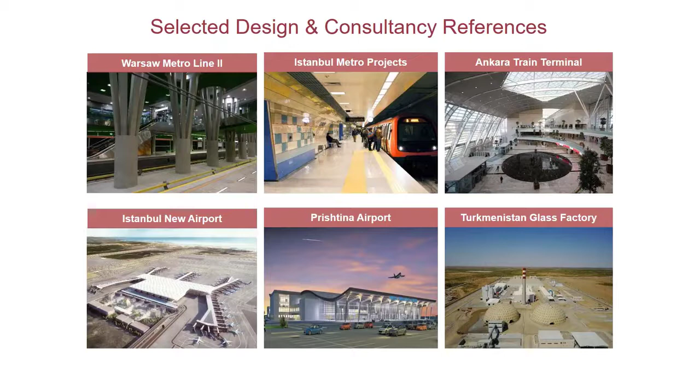And what I guess we want to emphasize over here is that the Prota Group is not just a software development group, but it also has a very strong background in engineering projects. So we're not just developing software without really using the software ourselves. And so being a first-hand user, we know exactly what is needed by the engineers, and so that's what we produce.

The ProtaStructure suite is on your screen right now. It's the ProtaStructure program, Prota Details, ProtaSteel, and Prota BIM. We'll be talking about ProtaSteel today mostly, but just to remind you of the other parts of the suite, ProtaStructure and Prota Details. ProtaStructure, as you know, is a structural BIM design solution for concrete and steel buildings. What needs to be remembered is it's very flexible. It's both 2D and 3D, and what's important, it's multi-material.

So you don't need to go to separate programs to model your concrete and then a different program to model your steel. It's all done within ProtaStructure, and it's a full analysis and detailed design package, full design reporting and quantity takeoff. It has links to Prota Details and ProtaSteel, which we will be talking about today, and then BIM links with Revit Structure and IFC. So that's ProtaStructure. And the main benefits, why would you use ProtaStructure?

It's the ease of use and maximum productivity. Obviously, in the times we're living in, there's a glut of software, and every software claims to do everything, and they do most of the time. But the question is, how do they do it? How much time do you need to spend to get a certain thing done? And if the difference between one software and another is a lot, then obviously that's what makes the difference, because this is man hours. So our main emphasis is on maximum productivity and ease of use. That's what makes it a much better product than its competitors.

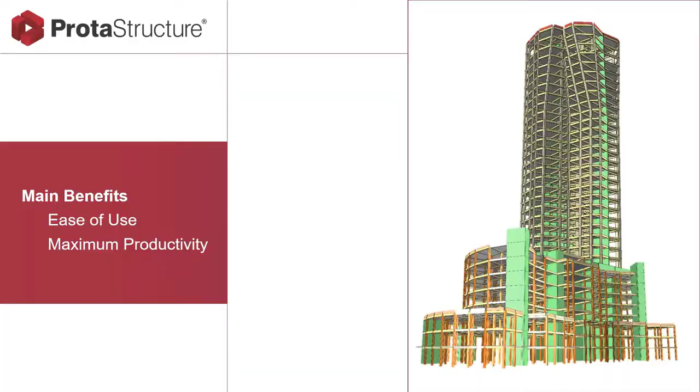ProtaSteel is, like I said, what we'll be talking about today. It's automated connection design and steel detailing of your projects. It's totally integrated with ProtaStructure. We'll be talking about some of the main features like Intelli-Connect and some of the design reports and the wide range of connections, etc. Obviously, in a seminar like this, it's impossible to go over all the features. All we want to do is just to get you excited about the main capabilities of the program, so that you can see what you can do with it and take it from there.

So ProtaSteel, today's webinar, what do we mean by connection design and steelwork detailing? What we mean is the full transfer of your ProtaStructure model to ProtaSteel, including all your analysis results. So once you're done with the ProtaStructure model, you will not have to remodel the structure in ProtaSteel again. You will just transfer the model, including the analysis results, into ProtaSteel and just start doing the detailing. It's integrated intelligent connection design using a comprehensive range of flexible connection macros. We'll be talking about those in a minute.

Automated steel connection design using our revolutionary Intelli-Connect to instantly create constructable arrangements. We'll be talking a lot about this. You'll see it's a fascinating feature. It's one of the features which no other software has at the moment.

Full connection design reporting with step-by-step calculation documentation. We'll be talking about this as well, and you will see that this is a feature which is normally a separate program. None of the programs which are offering this kind of capability are offering a full connection design reporting built into the program itself. Usually these programs are sold separately. I'll be talking about that part, but what you need to know is that it's entirely integrated, and there's a lot in it.

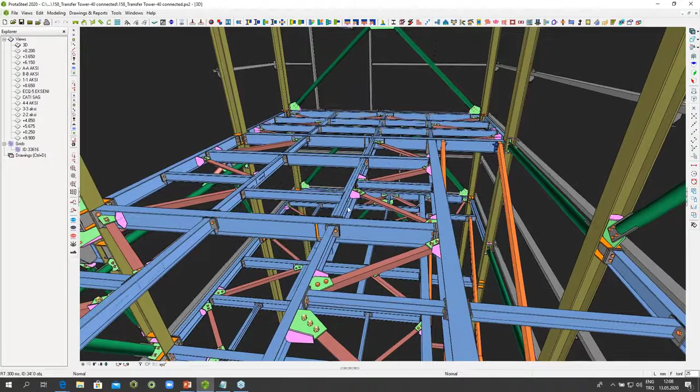So like I said, what is ProtaSteel? ProtaSteel is a steel detailing solution. As you can see on the screen, you have a little view of a detailed model, and I can zoom in to see what it is like. As you can see, all the bolts, all the plates, all the welds, all the elements, all the cuts have been modeled directly in. So the purpose of the program is to leave nothing unmodeled, to take the model from ProtaStructure to ProtaSteel, and then model all the connections in ProtaSteel.

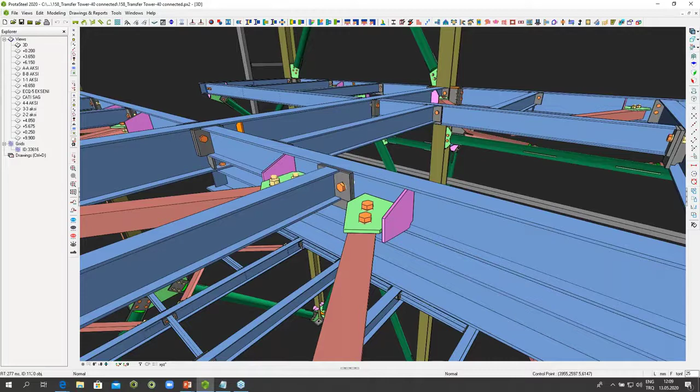And then once you have the model connected, you can create your shop drawings from there. You can create your connection drawings from there. You can take material takeoffs, etc. So that's what we'll be talking about today. So let me begin by opening the model on which I'm going to show you most of the features.

Okay, so the program is all about detailing. The program is all about connecting. So obviously we need connection macros. We need fast methods to connect the steel. So let's begin with some of the simpler connections. We've got a range of connections over here. You can see on the top of the screen. These are all the connections which are available.

And don't be misled into thinking that there are not so many, because in ProtaSteel, most of these connections are multi-faceted, and they can handle multiple situations, as I'll show you in a minute. For example, if I were to talk about the Purlin connection, you can see there are different types of connections which are all built into the same connection.

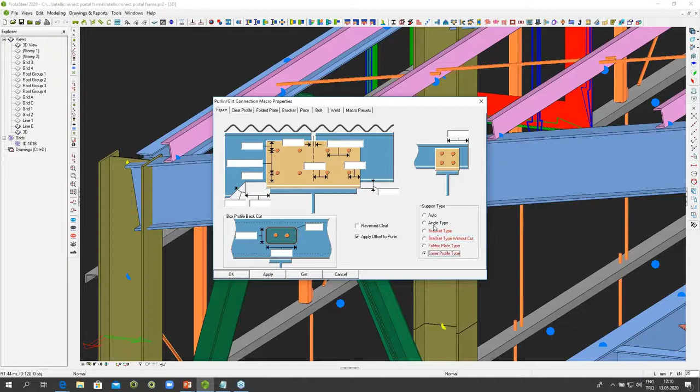So I'm going to choose the angle type with the reverse cleat over here right now. And I'm just going to show you. All you need to do is just pick the main beam and pick the purlin, and there you have the connection. It's as simple as that. There's nothing else you need to do, basically click the elements which are related, and there you go. Your connection is ready. It's as simple as that.

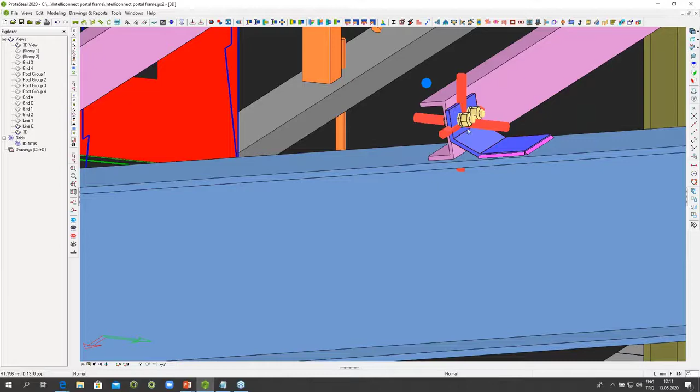And as you can see, as I just showed you a while ago, the options you have are many. You can change the type of the connection right from within the macro. You can go to a completely different connection, and normally programs would have all these features as different icons. So all these, the angle type, the bracket type without cut, the folded plate type, all these would be different icons, but that'll just create a clutter on the screen. But over here, what we have is you can just connect it as you go.

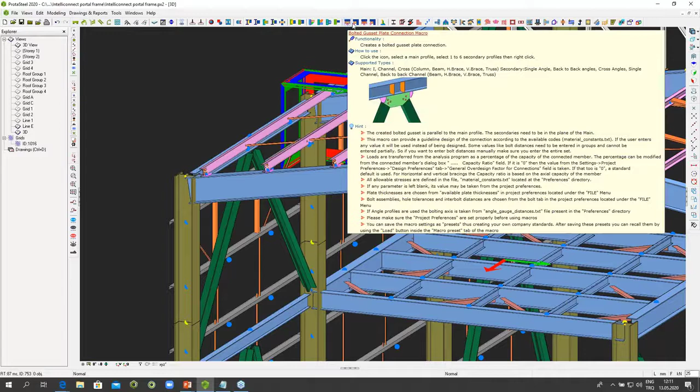You have the moment connections over there, the haunch connection, the directly welded connections, the flange plate moment connection, which is very commonly used, and you have the extended end plate connection, and then you have all your bracing connections for the vertical braces and the horizontal braces and the trusses, and you have the welded gusset connections and the welded corner gusset connections. Then you have connections for the purlins and the splices, and there's a whole lot which we can talk about, but let me just quickly take you through some of them over here.

So for example, if we were talking about the girt connection over here, let me go back to this particular connection and change the type and use the bracket type without cut, which is more appropriate for the girts, and just show the column, show this girt, show the other girt, and that's it. Reverse this. I don't want to make it hang from the top, so I'll use the reverse cleat option, and there you go. So as you can see, with a few clicks, I'm able to model my connection.

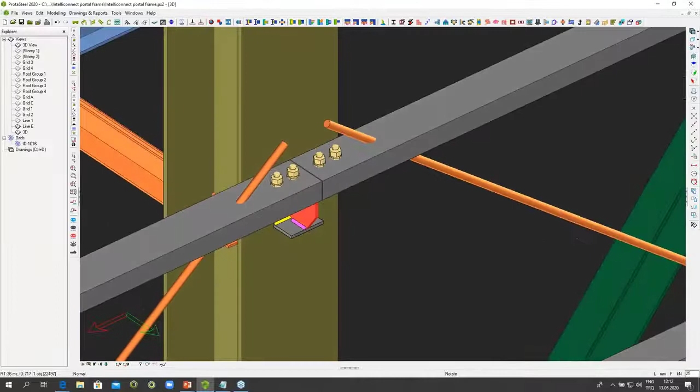Previously, we didn't have the welds in 3D. As you can see now, we have the welds in 3D, so it's easier to see your welds, and that makes it a lot easier to visualize them. In a similar way, you can continue connecting. For example, this point over here can also be connected with the same one. So whether there are two girts coming in or a single girt coming in, the same macro will be used to model it.

Now let's go over the splice. Obviously, every model is going to have areas which you will need to splice. So let's just go over that. Just by a few clicks, you are able to splice the connection. Let's go over some other columns. It's as easy as clicking, and I'm going to show you an even easier way in a while. But for the moment, you can see on the screen that it's extremely easy to connect.

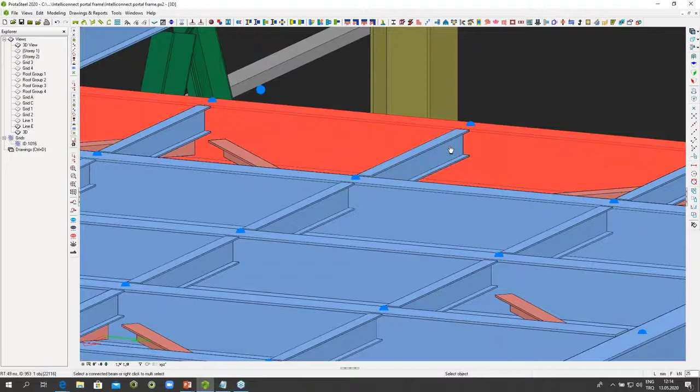Now let's talk a bit about the floor. It's one of the major parts of the connections. We have large floors in our buildings, and these floors can be connected in different ways. We have different options. For example, we can have a stiffened end plate connection. So I can just go and connect this main beam and this secondary beam, and there I have a stiffened end plate connection. And it's a very commonly used connection. It's one of the best connections as far as ease of erection is concerned. It's slightly eccentric, but it's also very useful for other reasons.

Then we have the beam-to-beam end plate connection. So for example, if we have this beam and this beam, we can have an end plate connection, which is different from a stiffened end plate. Or what we can do is we can have a fin plate connection. We can have a connection like this. So all these are options which we can use in our floors, and obviously all of them have their own merits, and depending on what we want to do, we can use them very easily. What I want to say over here is that all these connections are being designed as we go.

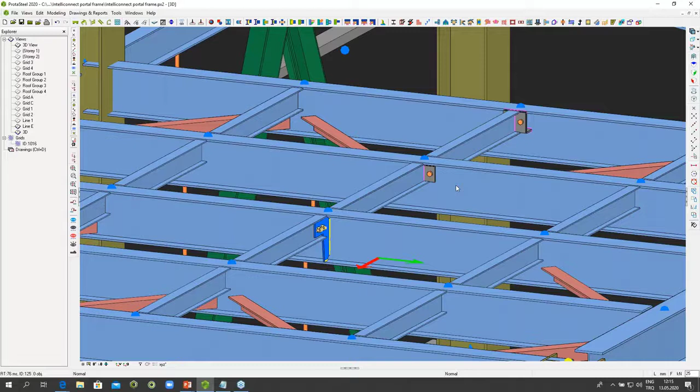So that's one of the most important features which we'll be talking about in a while, but I just want to emphasize that as we go along, normally the biggest amount of time which we lose, for example, when we are connecting, is that all these macros have a lot of input, and all these numbers have to be inputted theoretically, and that's a lot of input. I mean, anybody with not too much experience in the field of steel will find this pretty overwhelming to enter that much information to get a properly designed connection.

But with ProtaSteel, the advantage which you will not find in other softwares is that these connections are being designed according to the loads which have been transferred from ProtaStructure. So, for example, I'll do a little complicated example over here. Let's go and connect this column with this beam, and this is a haunch connection, and it's got the top stiffener and the bottom stiffener, but I want the middle stiffener as well. So I just go inside and I go to my figure and I add the middle stiffener. So now I have the middle stiffener as well.

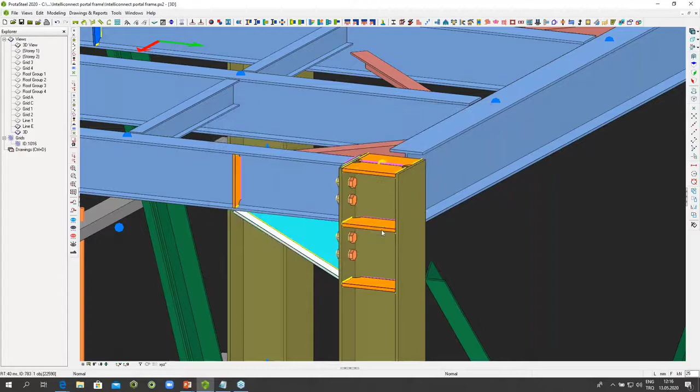Now I go on the other side, and on the other side I have another beam coming in, and this beam needs to be connected. But now these two stiffeners are creating a problem. They're getting in the way of the connection. So I'll show you a feature which is very useful. I just select the column, select the beam, and I say that I want to use these existing stiffeners from the other connection as part of my connection, and there you go.

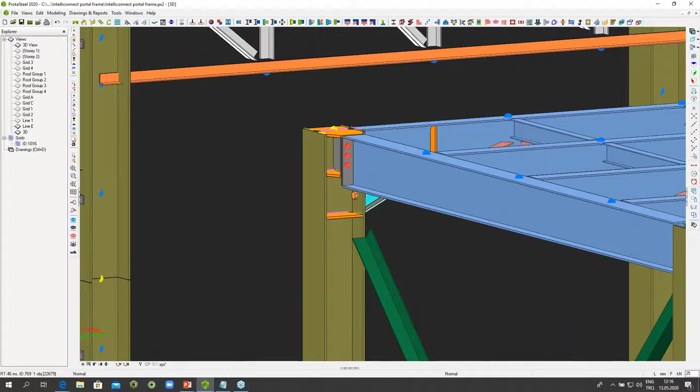So what you're seeing is a very complicated joint with a haunch on one side and a stiffened end plate connection on the other side, which have worked together, as you can see on the screen. And with a few clicks, we've been able to connect them. I showed you the floor beams, the haunch connection, the connection from the other side. I can show you how the fin plate is connected, how the stiffened end plate is connected.

Let's do a bit of the bracings. For example, these are the vertical bracings. All you need to do is just show the beam and show this vertical bracing, and there you go. Your connection is done. Let's do a bit of the trusses, for example. Let's go over the trusses. So for the trusses, all I need to do is choose a welded gusset connection, and I need to choose the bottom chord. These are the secondary elements, and my truss is connected.

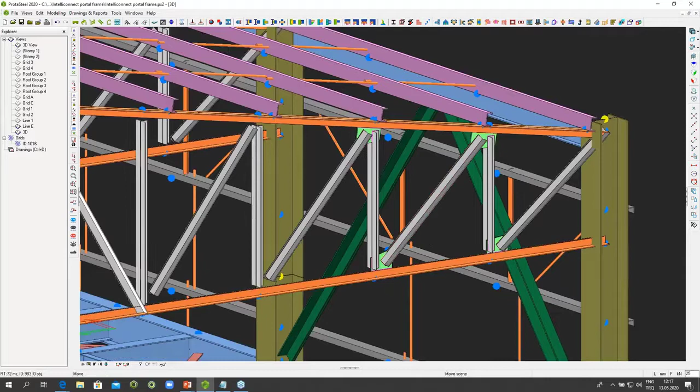This one is connected as well. This is connected as well. As you can see, I'm just clicking on the elements, and the connections are being made. What about over here or over here? If I come to this point, what I can do is I can quickly use this macro over here and connect the truss. So very quickly, as you can see on the screen, I can go about making my connections. Let's do a bit of base plates.

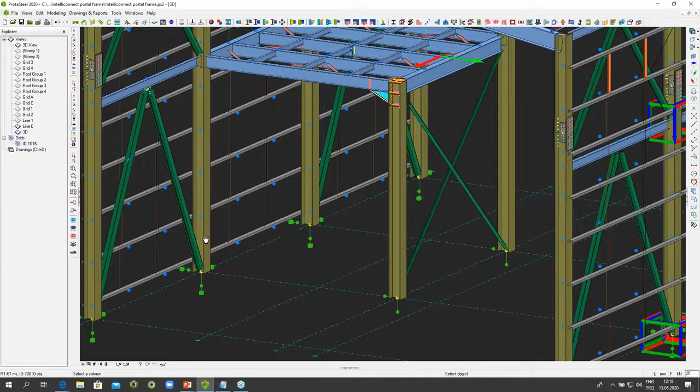So for example, this is one feature I want to talk about quickly and then move on. Let's do a base plate, and it's the same macro as you will see, but there's a difference between this column and this column. And the difference is that this column has a fixed base. As you can see, all the releases have been fixed, whereas this column has a hinge. So the rotations are allowed. The program will automatically detect this, and while I'm using the base plate on this column, it's going to produce a fixed connection. But when I use the same macro on the hinged column, it's going to produce the hinge connection depending on the end conditions of the column.

So these kinds of presets, which I'm not going to be talking much about today because we don't have much time, but what you can do with ProtaSteel is you can actually create company presets for all different types of profiles, and then basically just start clicking away with these intelligent macros. Because you'll have the company presets in the background. They will be intelligent. They will realize which profile you're talking about. They'll realize what structural condition exists, and they'll know the loads. And all you will need to do is just point and shoot.

The other programs, if you actually sit down and compare, what you will see is that the majority of your time is spent on entering the data. This is no exaggeration. The majority of the time is spent on all these numbers on the screen. There's so much to input for each and every connection.

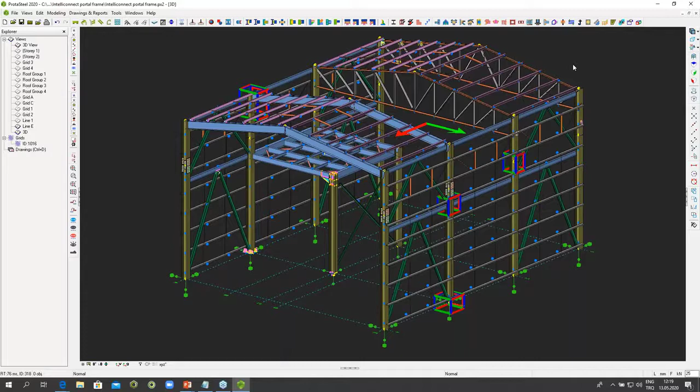So normally, even if you were well experienced, you would spend about 5 to 10 minutes entering a single connection. But once you have the loads from ProtaStructure, once you have the company standards set up, and once you have the company presets set up, it becomes extremely easy to make these connections. And of course, it's not just structural connections. Let me just continue with this a bit.

So we had a base plate over here, and what you can do is you can add the anchor bolts, for example. So you can select this base plate and you can add anchor bolts to that, and then you can double click on the anchor bolt and say I want a different angle on that, and you can turn it to whichever direction you want, and very easily you have your anchor bolts fit in.

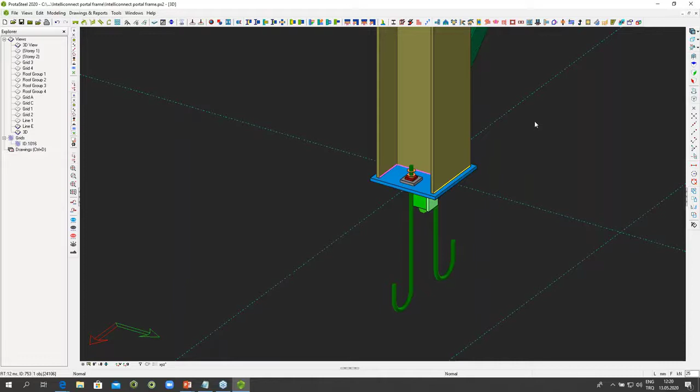Obviously, this is not the only type which is supported. You can have different types of anchor bolts, the C type, the simple type, and there's a background file which you can change to modify the different types. So those are very easy. And let me come back to the non-structural connections for a bit now, so that you can see the wide variety of things I'm talking about. But before I do that, let's do this.

So let's say we have a floor which has a concrete top on it. So we can add the studs extremely easily, as you can see. Very easily, I'm just going to add the studs. So it was as simple as that.

Now let me go ahead and add some handrails, just to give you an idea. Let me just add a handrail over there. Let me just add a handrail over here. And let me add a handrail on that beam. And once the handrails are added, you might think they're connected to each other. They're at a distance. They shouldn't be like this.

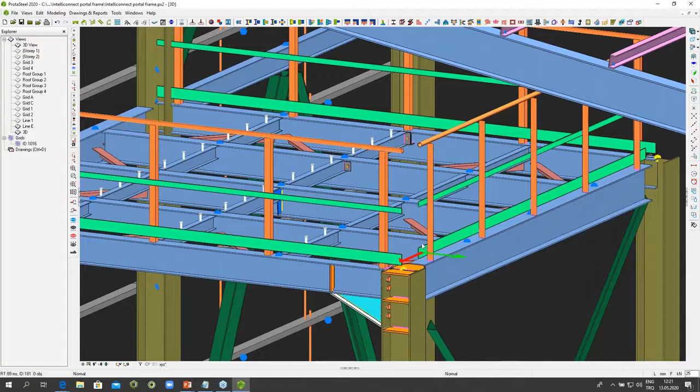So we have something which I just showed, that this handrail needs to be connected to this handrail. And there you go. Even the pipes are connected. The bottom, the toe plate and the knee plate, they're all connected. Let's join these two as well. I need to go to the other side to see it better.

Yeah, just go to the other side and go to my connection, and I say this handrail needs to be connected to this handrail, and there you go. So the knee rails, the knee plates, and the toe plates are all connected. So as you can see, it's not just structural connections, it's the non-structural connections as well, which can easily be modeled. What about if we had some checkered plate on this?

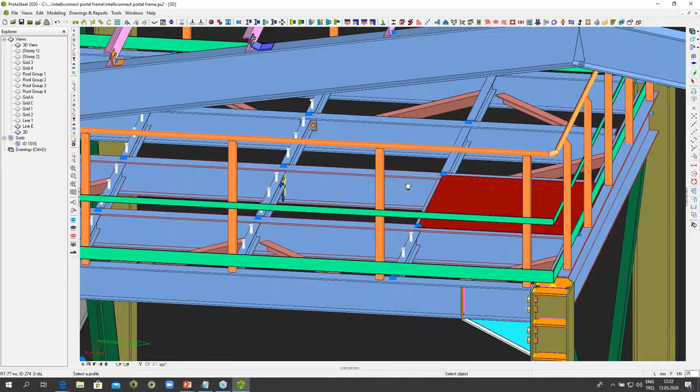So if I were to have a checkered plate on this, for example, if I were to select this beam, this beam, this beam, and this beam, and right click, I can immediately produce a checkered plate flooring, and that's as simple as that. I can go on and copy them around as well. So what I want to emphasize over here, not wanting to take too much time, is that these connections are extremely easy to use, and they shouldn't overwhelm you at all.

Now I want to move on to the next feature, which is the connection reports. So let me just open this model again so that I can take you through that. So what is the need? Where is the need for that? Obviously, all the consultancy companies want to connect their models, but they also want to produce the connection reports, the connection design reports for the client for approvals.

And normally, I talked about this in the beginning as well. Normally this not only is very time consuming, you have to use dedicated software for this, and those kinds of software are not cheap. You have to spend thousands of dollars for each license just to get this feature of being able to produce the connection reports. Now let me just show you, for example, over here.

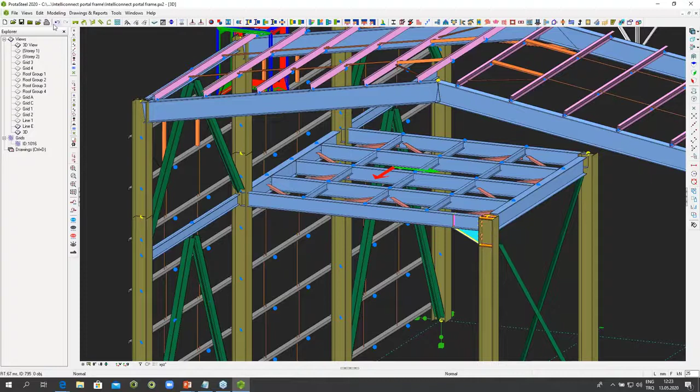Let me do a quick haunch connection over here, and let me connect this column to this beam. And what I want to show you is that there's a color coding scheme which I want to open right now. It's over here under the views menu. When you open it, everything turns white except for the connections which have been checked. And if the connection is green, what it means is that everything worked.

Nothing has failed. And if the connection is not green, if it is red, that would mean that something inside the connection has failed, whether it's a bolt or a plate or a weld or whatever, but then you have to go inside the report and see. So let's go inside this report. All you need to do is select the macro and say, I want to see the default connection report in this case.

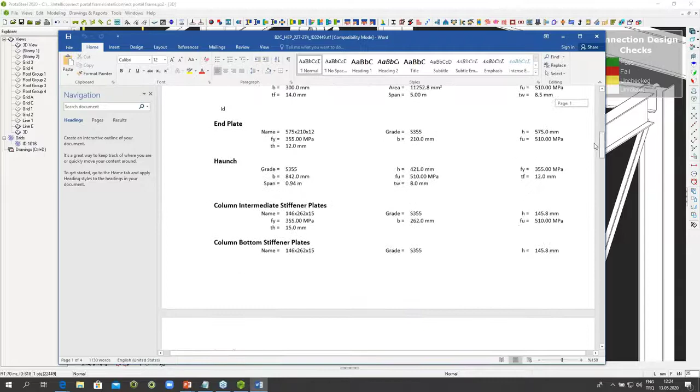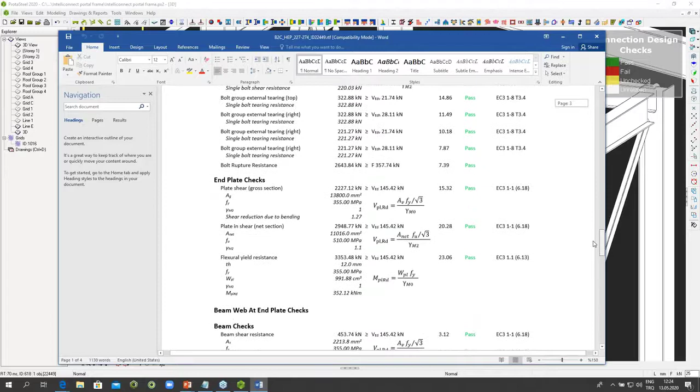And the report is ready in the background, and as you can see, this is a full-fledged report with a picture on top. It gives all the input information in the beginning, and then it starts the checks, the geometric checks in the beginning, and then actually the stress checks, and they're all passing. Nothing has failed. Green color means everything has passed. If you see something red, then something has failed. So let's make something fail.

For example, if I were to reduce the thickness of this, maybe that will make it red. Yeah, okay, so I reduced the thickness of the stiffener, and there's a buckling of the stiffener going on because of the heavy moment loads. And let me report now.

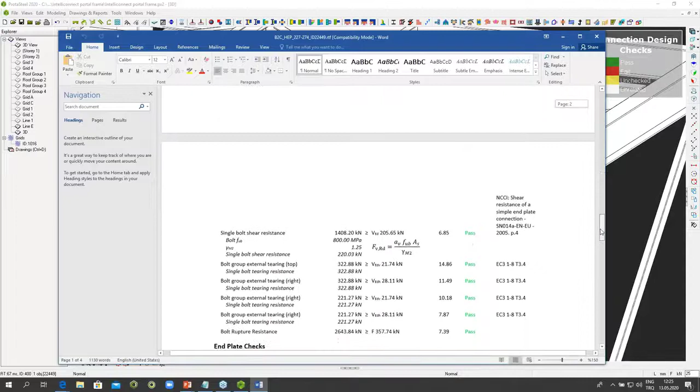And now when we go through the report again, we see that a lot of it is still green, but we have something failing. The intermediate stiffener has failed, and it hasn't failed by much, but it's failed. So as you can see, it's extremely useful to just use this feature as it is. You can visually see immediately whether the connection is green or red. You don't need to worry about the green ones. You just keep on clicking and making your connections. Whenever you see something red, you stop.

And what I can tell you is that in most of the cases, if it is red, it will be a very minor thing, because in the background we are doing a basic guideline design to begin with. So most of the major checks are usually completed before you do it. Let me just show you a flange plate moment connection over here. Let's see if this is the one. Yeah, so let's connect this column with this beam. Yes, so that's coming out red. And let's go on the other side and see what the problem is.

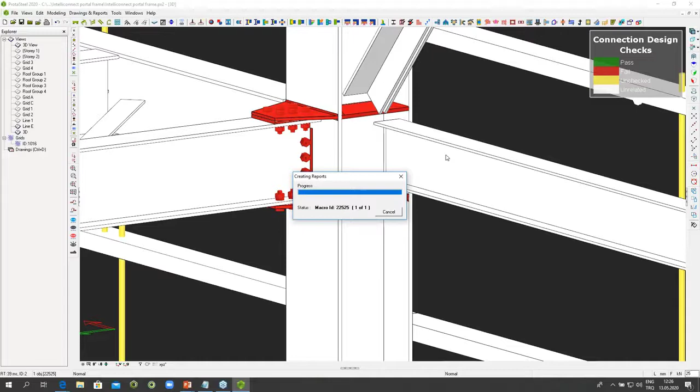There we go. And once again, you will see that the major checks will all be passed, and there could be some minor failures with the stiffener sometimes. And all these can be bypassed by the company standards. By the way, you can input your company standards, and they will help you. So you see some stiffeners failing at the end. So obviously this has a pretty simple solution in all probability.

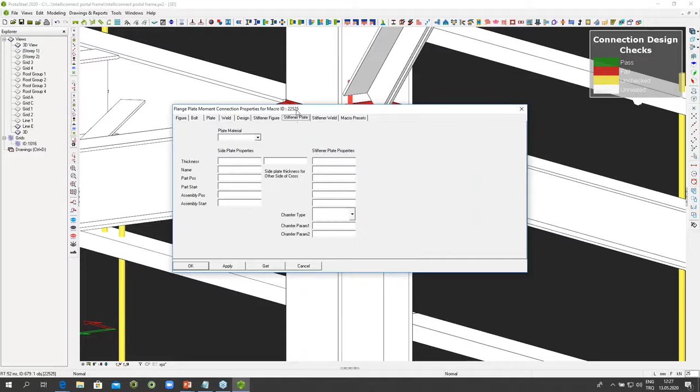Let me just go to that. Go back to the macro. And I think it could be this one. I'm not sure, but let's see. Yeah, so I increased the stiffener size, and now everything is green again. So this feature is incredibly powerful.

I did another one for the stiffened end plate, and I deliberately increased the load extremely high so that it would fail, just to show you what will happen. So I'm going to connect this with this. It's red because the load is extremely high. I've just made it extremely high. And I know in this case it's the bolt which is failing. The bolt stresses are very high. So let me show you that in a minute as well.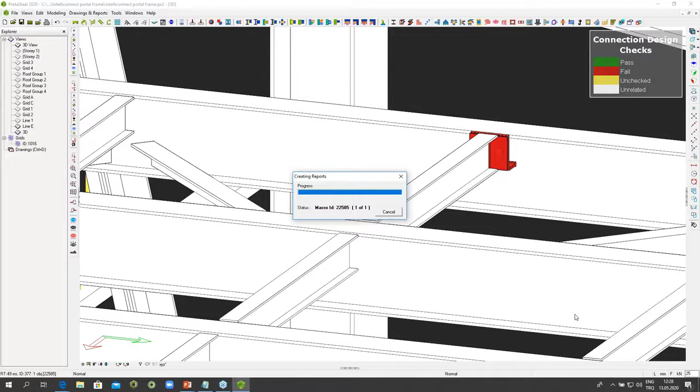Yeah, let's quickly go through this, and there you see shear resistance is causing the problem. So I know this is an M16 bolt. I'm going to change it to an M20 bolt. So I'm going to go to the bolt assembly, and I'm going to change the diameter of the bolt to a 20mm bolt, and there you go. So it's as simple as that.

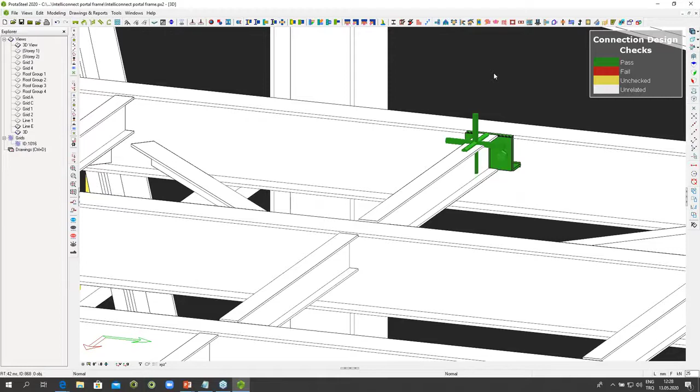You just make the few changes which are required. You either change the bolt size, or change the plate thickness, or change the weld size whenever needed. And like I said, in 99% of the cases, they will be avoided because it's already doing the design according to the loads and your company standards. I deliberately made a few things fail over here just to show you what it looks like, so that the whole thing becomes clear.

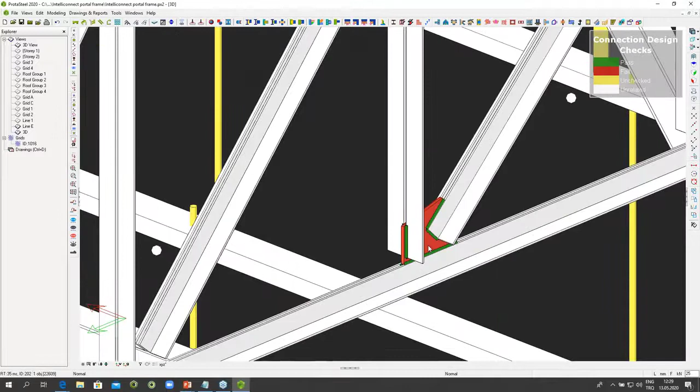Now, what we have the reports for right now is all your floor beam connections, all your column beam connections, whether they are simple connections or moment connections, they're all covered. And not only that, if we were to connect this truss over here, this is the bracing connection, and we can just open the report quickly and see that the bracing connection has a full report attached to it.

There you go. This is a very exciting feature. I wanted to go into it in some detail. Obviously, we don't have much time, but what I want to reiterate at this point is this feature is sold separately for thousands of dollars, which you're going to get as a part of your ProtaSteel, and this is going to make your work extremely easy.

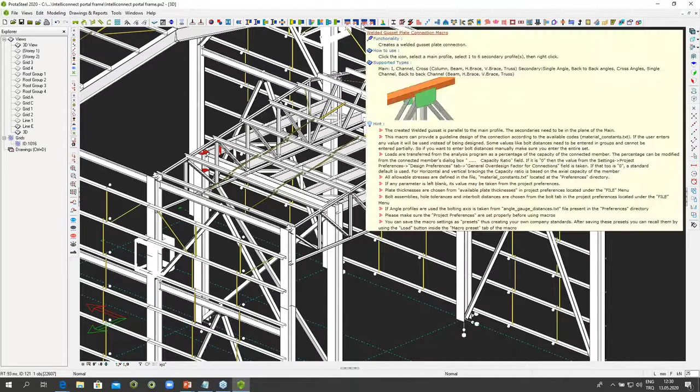So let me just summarize: we have all your bracing connections, your bolted bracing connections, your welded bracing connections, your column moment connections, column simple connections, floor beam connections. All of them have their reports ready at this point in time. Your sag rod reports or your purlin and girt reports will be coming in down the line as well. But all the major connections, like your base plates, floor beams, simple column to beam connections, moment connections, and splices.

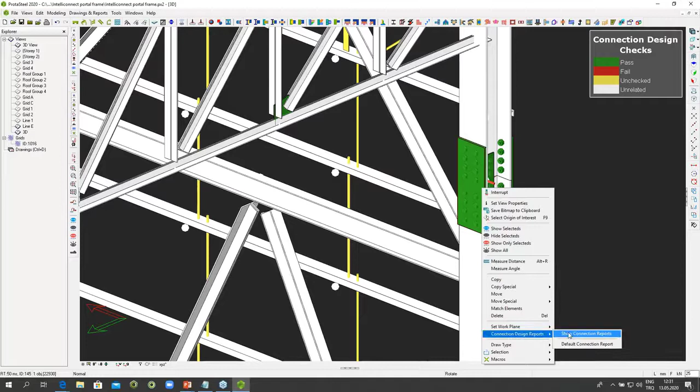So let me just do a quick splice over here. Sorry. There you go. That's a green splice, and you can go inside and see the report as well. All these are available on the fly, and this will save you a lot of time and a lot of money.

As you can see, all your tests, all your geometric tests are there. It's a beautiful report. You can just print them out all together in one go at the end. You will have your entire analysis regarding these connections done. Now, I want to move on because we don't have much time.

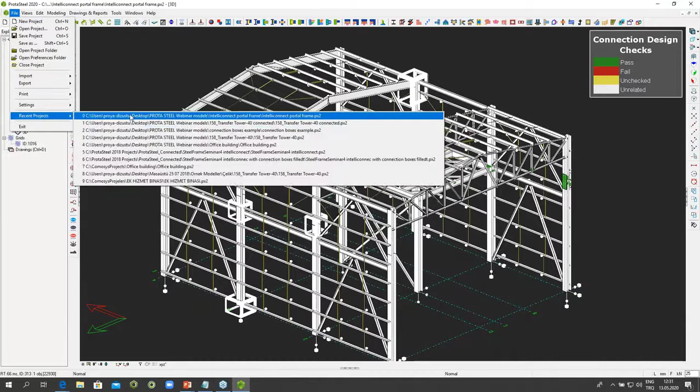I want to move on to a very exciting feature, which is what we call Intelli-Connect. Let me just go to this. There we go. Like I told you, it was easy to connect the steel and make the connections. It's as simple as point and shoot. You have the loads, you have the company presets, you just pick the elements and there you go. But some of you might think even that takes a lot of time in a building like this. It's going to take me probably a day or two to go over all the connections one by one.

So what I want to show you now is a revolutionary technology, which we call Intelli-Connect. It works on a node by node case. It'll look at this node and analyze it, see what it looks like. It's got a connection coming in from here, and from that side. At this node over here, it's going to say it's got a fixed connection coming in, two simple connections coming in from those sides, and a vertical brace coming in, and it'll try to decide what a good engineering solution can be for those points, and it's going to make that solution for you.

Some of the cases are very simple, like the purlins and the girts. But some are extremely complicated, like a place where you have a column with beams coming in from all sides and vertical braces. This is a place where you have 8 different connections going in. If you use features available in other programs, usually called Auto-Connect or something, you will see everything clashing with everything, because the haunch plates will be clashing with the stiffened end plates, and the bracing will be clashing with this. You'll have to delete it and do it all over again.

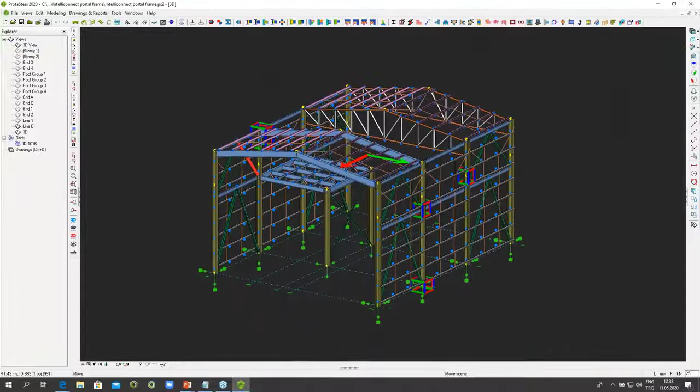So we're going to take you through this revolutionary technology, Intelli-Connect, and show you how it works. How it works is extremely simple. All you do is select the whole building. Well, obviously you don't have to do that. You can do it partially as well.

But you select the building, and you make sure you select the nodes as well, because like I said, these little dots, those are the finite element nodes, because it works on a node by node basis. So you make sure the nodes are visible, and then you select them. And once you select them, all you need to do is right click and go to the Intelli-Connect menu. And once you go to the Intelli-Connect menu, let's say you want to connect all the purlins.

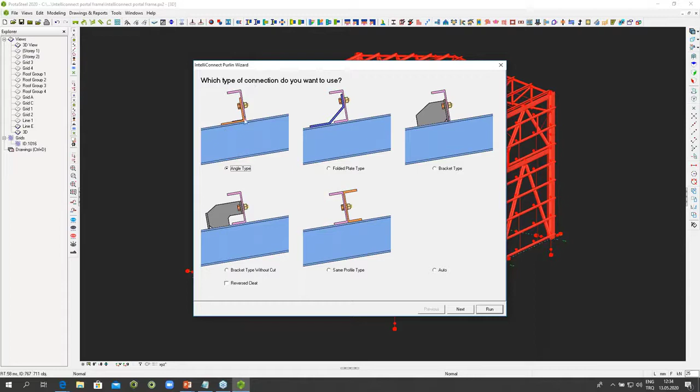Now there are maybe about 30, 40 different purlins, and some of you might be thinking that's going to take me an hour to connect. So just go to the purlin connections, and you have all the different features. Now over here, you don't even have to learn how the macro works. Let's say you prefer the angle type, the cleat in this direction, but you want to reverse the cleat so it looks like this, and you want to connect all the purlins. There's another feature here which is for the end purlins. You can extend them if you want. I'm not going to extend them right now, but you can.

But you just say run, and now it's going through the model. It's checking each node, and it's trying to find out which nodes have purlins on them. And then it's selectively taking those nodes, using the purlin connections with the particular settings which you gave it, and it gives you a list of what it managed to do. Now, in some cases, it will not be able to perfectly finish the job.

But over here it says, look, I found node number 2583. I was able to connect it. I found node number 2584. I was able to connect it. So basically, just quickly go through this, and if you see something which is not done, you can modify that by hand later. But let's go and see what it's done. So you can see very quickly that all the purlins connected, and exactly the way we wanted them to be connected.

Now I want a different connection for the girts. So let me just select the whole thing, right click, Intelli-Connect, and go for the girt connections. But this time I don't want the angle cleat, because with the angle cleat you need very large angles for this. I prefer this bracket type without cut, and I just want to go with that.

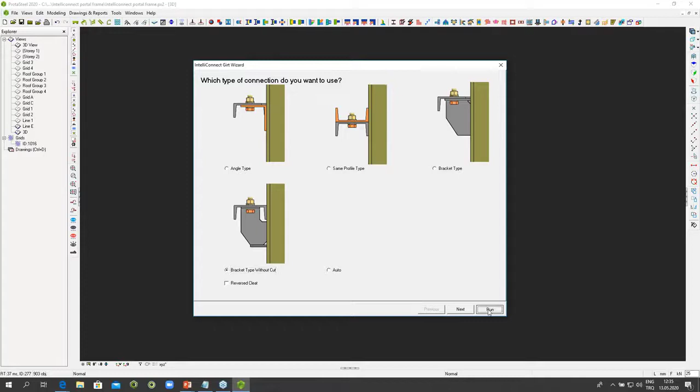So I just say run, and now it's going through the whole building, finding the girts wherever they are, whether they're single-sided or double-sided. It's going to decide itself. Let me go through this quickly again, so everything is hopefully done. Yeah. So the single-sided ones have been connected with a single click, and the double-sided ones have also been connected. So not only does it pick up the node, it also picks up the configuration of the node. This is extremely powerful. This is very useful. It really reduces the effort for somebody who's afraid of 3D steel modeling.

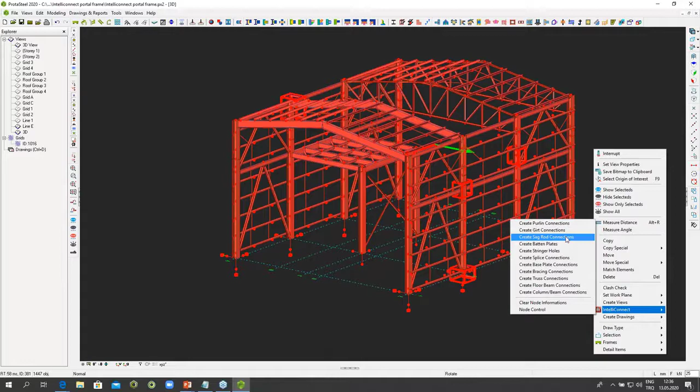Let me choose the whole building again, and let's say I want to connect the sag rods. The sag rods are quite a headache, as most of you will know if you've ever done steel detailing. But let me just go through, and this time, because there's a standard procedure for those, it just starts the connection. Okay, so we're good, hopefully. There are some of them which were not connected, which I'll talk about in a minute.

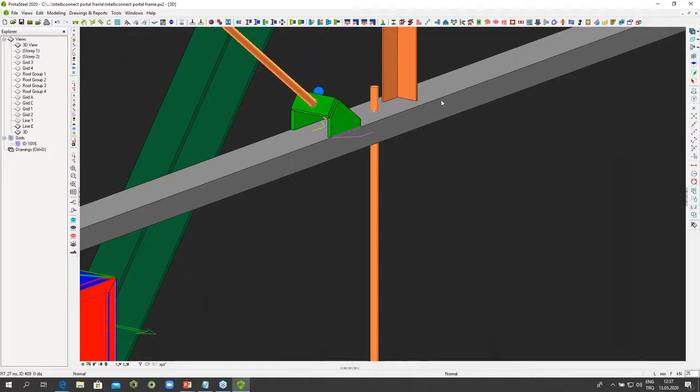But look at these. All the holes in the girts have been made. Wherever the sag rod is passing, there's a hole in the girt, and whenever we have a different type of connection, that has also been connected. Only these ones have not been connected, which then need to be done manually, because they're a different type which was not available to the Intelli-Connect feature at this point.

Next, let's select the whole building again, do a right click, go to the Intelli-Connect menu, and say I want to do the splice connections. Now there are not many splices over here, but let's just start that, and immediately you can see on the screen it's finding all the places. It's going through the nodes and saying, okay, this is a splice location. The two elements are coming in, they're parallel to each other, they're columns or beams or whatever, and they're aligned as well. So this is a splice location, and it's just gone in and done the splices for you in a second. So that's extremely powerful.

Let's select the whole building again, go to the Intelli-Connect menu, and do the truss connections, for example. The truss connections usually take quite a lot of time, so let me just go through those quickly. In the background, you can see what it's doing.

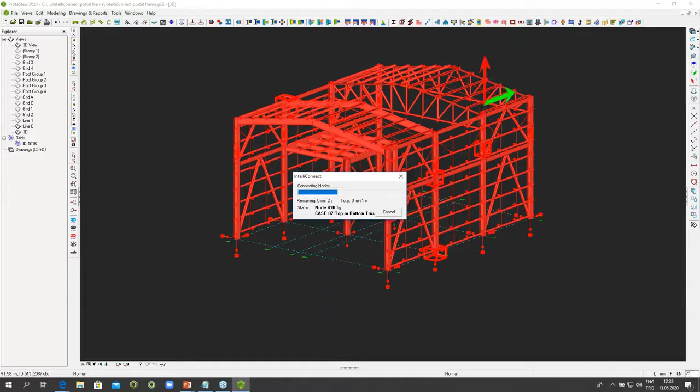This is taking a bit longer. And the reason why they're taking a bit longer than usual, by usual I mean from the previous releases, is that at this point they're also creating the design reports in the background, which you can then access later on. So some of you who have been using the program might notice a slight reduction in speed over here, but that's because of the production of design reports in the background.

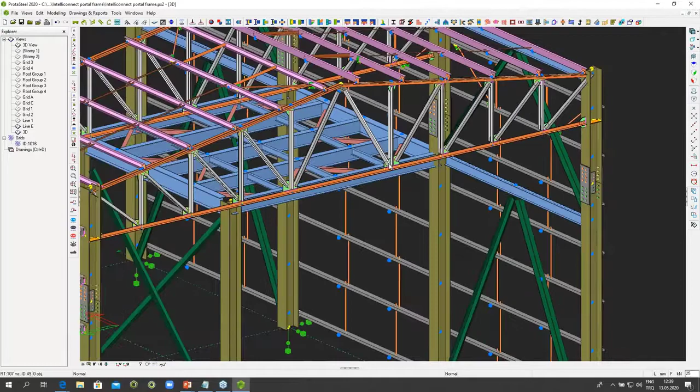So here again, we see the connections over here, which have been made. And let's just flip the building around and see. There you go. It's chosen the welded connection over the bolted connection, depending on certain parameters, which I don't want to go into right now. You can customize that. Obviously, trusses are connected with a welded gusset, not with a bolted gusset. That's very customizable. But it was so easy. I just selected the whole building and just pressed.

Now I want to do something else. Let's come to some of the very difficult connections, which are really a huge problem. Let's go in there, and I want to zoom in so that you can see some of the stuff. Hopefully, yeah, maybe you can see it. I'm just going to select this part of the building and do the floor beams. And the reason why I've zoomed in is because I want to show you a feature which is important.

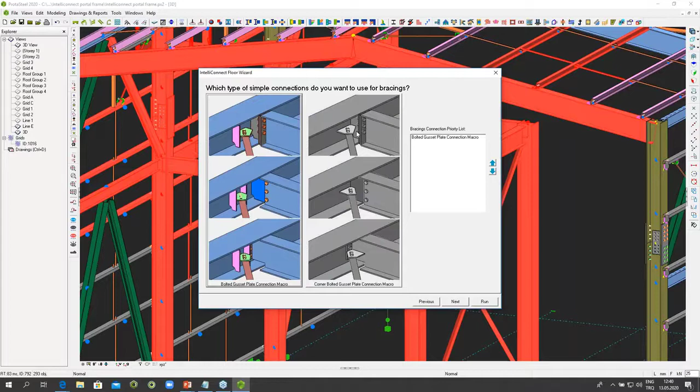I'm going to do the floor beams, and I'm going to say use the stiffened end plate connection for the beams. And for the horizontal braces, I want to use the corner bolted gusset or the bolted gusset, depending on what it can. Or let's use the bolted gusset first, and then the corner bolted gusset. Let's use it the other way around. Yeah. These are some details that I want right now. But what I want to show you is, I'm just going to take this window to the side a bit, and I want you to focus on this part of the screen.

And hopefully, if you really strain your eyes, you can see some of the horizontal braces moving, because what's going to happen is it will not be able to connect them directly. It will connect the beam, and then when it connects the horizontal bracing, there'll be a clash. So in some cases, it will need to move the horizontal braces a bit, to shift them a bit, and that's what no other program does at the moment. So I'm just pressing run. Now just focus on the screen, and hopefully you will see some motion.

I know it's difficult to see with the low resolution you might be getting, but you can see some of the stuff moving around. I can see it, but I hope you can see it as well. But those are the horizontal braces which are moving. It's trying to move and trying to create a connection which doesn't clash with the other connection.

And that's a huge feature, because I've spent a lot of time in my youth working with steel detailing, and I know from personal experience that connecting these floors is a breeze when you have no horizontal bracing. But once you have horizontal bracing, it takes a lot of time, because each angle of approach and each brace's situation is different, and you have to decide whether it's possible to shift or not, and how much you need to shift. And getting all that done by the program is something which is amazing.

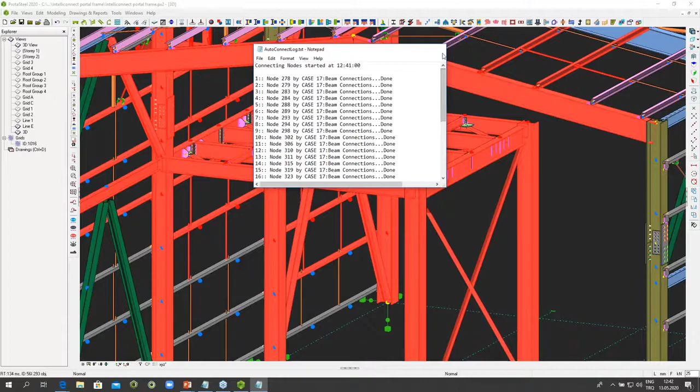So if I zoom in over there, you can see it has shifted this because it was clashing with the stiffened end plate over there. And this kind of versatility and this kind of intelligence is extremely useful, because it will save you days at times. Even when you're dealing with a small floor, it'll save you a lot of hours.

Now I want to show you the final part of the connection, which is the column node, which I talked about.

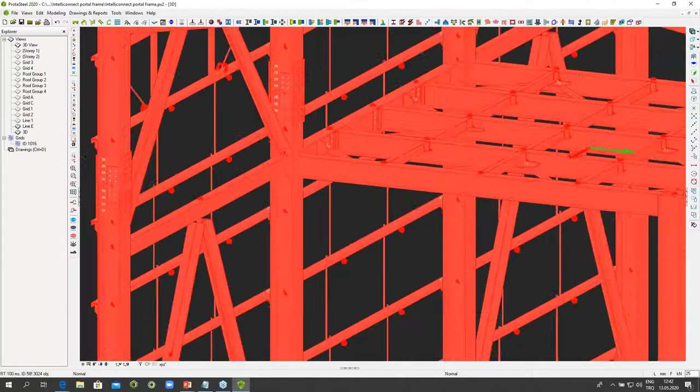Which, if you remember, I talked about this particular point, which is a column with the beam coming in from the fixed side and two beams coming in from the hinged side, and a vertical bracing coming in as well. Those are the really difficult prospects. In fact, I don't have much time, so instead of doing the whole building, I just want to show you, I'll just do it over here.

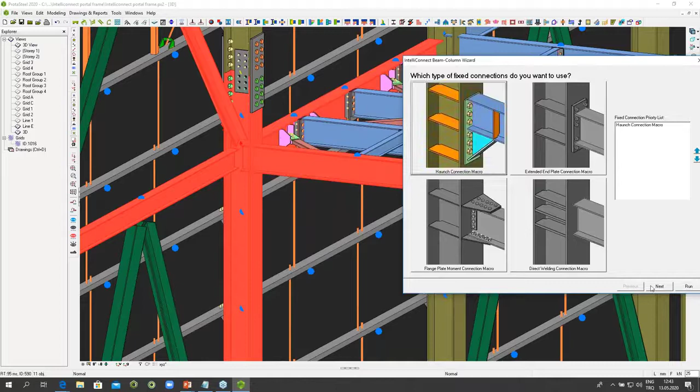Select this area over here and right click and say Intelli-Connect and do the column beam connection. And I tell it to use the haunch connection for the fixed side, and I tell it to use the stiffened end plate from the hinged side. And the vertical bracing is going to be done by the corner bolted gusset automatically. And I just tell it to connect.

Now, as you can see, it has automatically created the haunch. It's created the haunch with the middle stiffener as well, because it knows it's going to need the middle stiffener for the other side. It's created the middle stiffener, and let's rotate. And it's created this stiffened end plate connection. It's created the other stiffened end plate connection from the other side, and it has also used the top stiffener as a corner limiting object for the vertical brace.

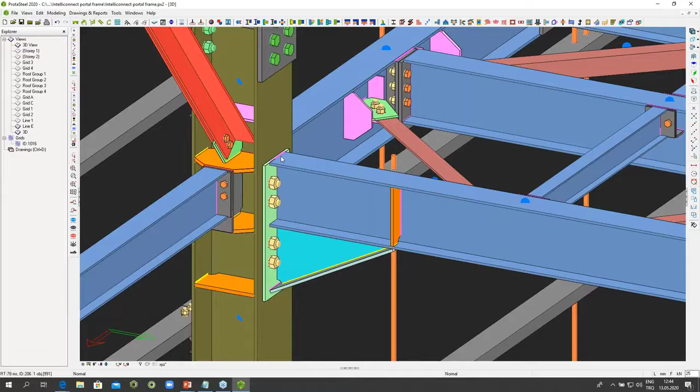Now this is a very complicated point, and I need to emphasize this as much as I can, because those who have done steel detailing will know that these kinds of joints are very difficult to model. But with Intelli-Connect technology, and even without it, like I showed you manually as well, you can do these things manually. But I know there's a learning curve, and I know some people will be terrified of that. So I'm just telling you that with the Intelli-Connect feature, the learning curve is shortened immensely in many ways. And that's what I wanted to show you with the Intelli-Connect feature.

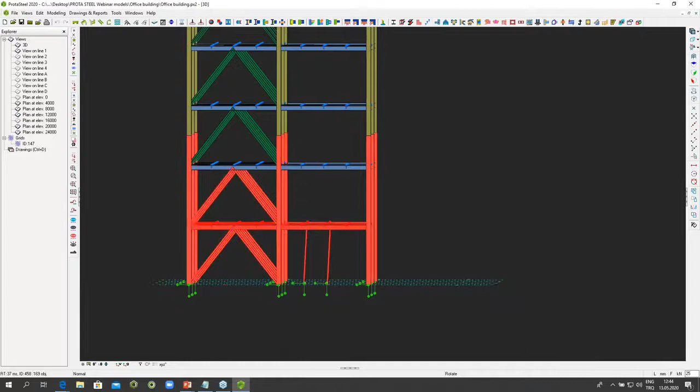Now, the reason why I'm showing this to you is because I want to then show you another feature, which is the copying feature. Once you're satisfied with a particular floor, and if other floors are similar, the same, or even if they're slightly different, you can make a floor and then copy it to the other floors, and it will automatically find which parts of the floor match and which don't, and it will connect those which match and leave those which don't. This will save you a lot, because 100% similarity is not required. It doesn't need to be exactly the same. It will automatically go and find similar situations on the other floors.

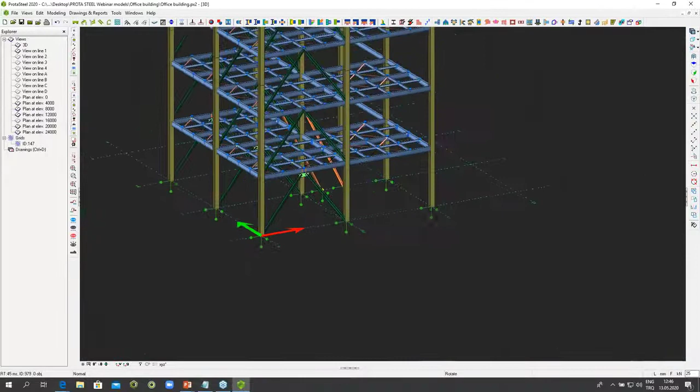So let's just quickly see what I'm talking about over here. I just connected this floor using Intelli-Connect. Let me just open up the visibility of the plates and bolts and macro symbols so that they're visible. Yeah, there you go. So the floor has been connected, as you can see. But now what I want to do is quickly move to the side over here and select this area, select the macros.

There are 135 connections, and I want to copy them up to the next floor. So I say copy, and there's a distance of about 4,000, about 4 meters from here to here. The other floor could have been a bit different, but I'm just telling it to copy. Let's say copy, and it will go and find whether you have exactly the same situation in the new floor as well or not. And if you do, it will copy the connection to that point as well.

There you go. As simple as that. And we have the second floor completed as well. So that was just one feature I wanted to talk about because I think it's important. And now I want to move on to something else, which is the connection details.

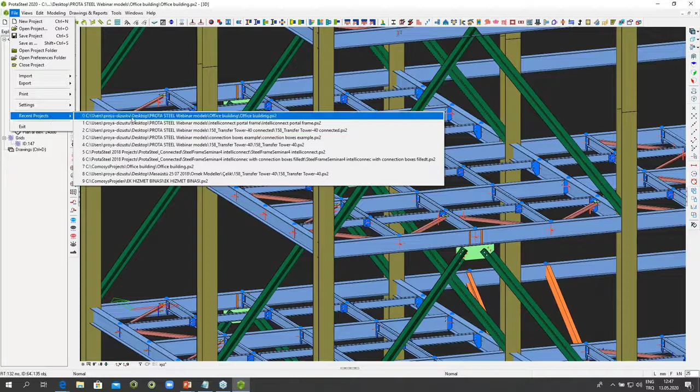So most of the companies which are consulting companies need this feature primarily, not the fabricators. What they need is to produce connection drawings. As they're connecting a particular joint, they want to produce a drawing of that joint and then pass it on to the fabricator so that the fabricator can do the rest of the model and produce the shop drawings.

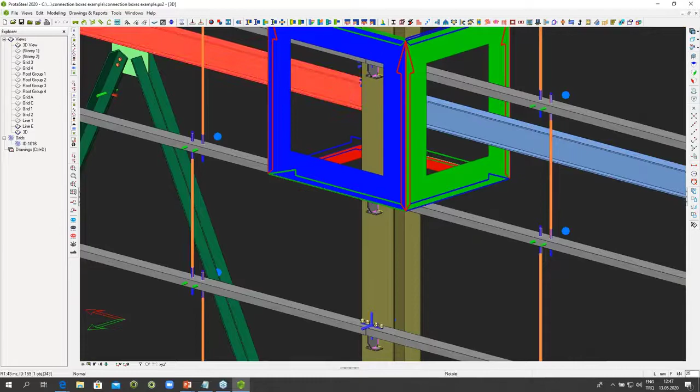So they produce a base plate, for example, a splice, or a column joint where you have some stiffened end plate and vertical bracing connections. These are some of the connections I've done as an example. What we have in ProtaSteel, what I want to talk about today, are these little boxes you see on the screen. This one, this one, this one. These boxes are intelligent, and when you go to the drawing, they will appear as details. You can limit the scope, you can limit the size.

For example, all these boxes have the red, the green and the blue. It's like the RGB system. Red gives you the X direction, green gives you the Y direction, and blue gives you the Z direction. You can view any part of the model from these three directions, and from any general direction as well. That's separate, and you can view them from both sides.

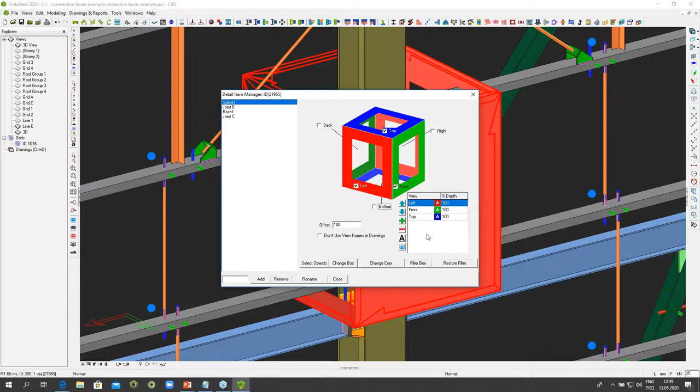So you can view from the positive X direction and from the negative X direction if you want. This is the negative X direction. You can view from the positive Y direction, and from the negative Y direction as well, or from the positive Z direction, or from both sides. That's completely up to you. Once you decide how you want to view it, you can even add a 3D view to it. Then once you produce the drawing of this facade, you see these boxes detailed out on the side, and this is what we're going to be talking about today.

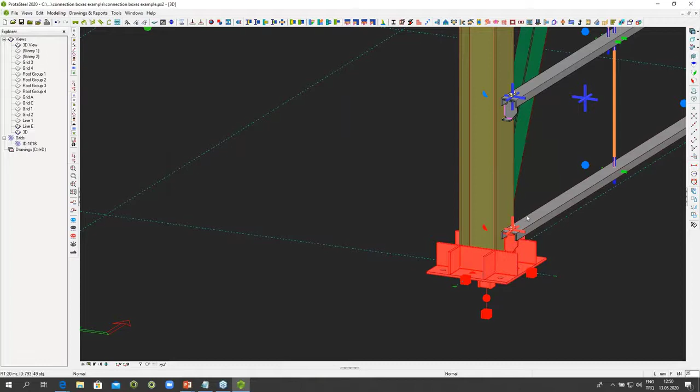The creation of these boxes is extremely easy. Let me just make another one from scratch so that it becomes easily understandable. Let's say I want to produce a box around this base plate over here. All I need to do is select the parts which I want in the connection, not the incoming main parts, just the parts which I want to show as part of the connection. I press this little button over here, I give it a name, and I say add. Now these parts have been added to the test object.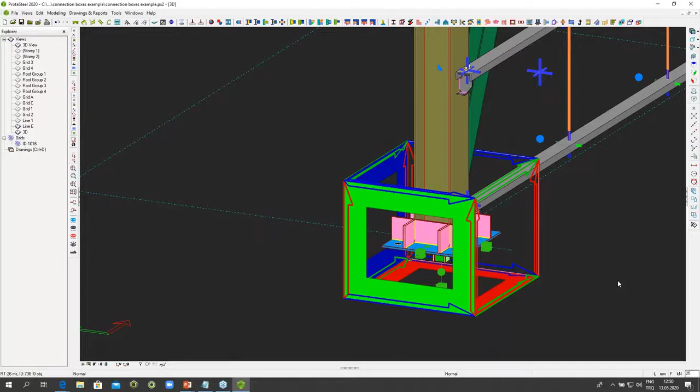Then I say select objects, and I add the column, which is going to be the secondary member. It's a main member, but for the connection, it's a secondary member. I press right click, and the moment I press right click, a box is created. Now this box can be used. I can make it bigger or smaller, add more elements to it, add viewing directions, add a 3D view. It's as simple as that. I did it in like half a minute. So you can create as many boxes as you want.

Once you're done with the boxes, you can just go to the drawing side, which I'll do in a minute, and create these drawings. So let me go to the drawing side and show you. First of all, let me show you a 3D view of the building, which might take a bit because it's fully detailed, but it shouldn't be that long.

There you go. Over here you see a full hidden line view with the bolts and the welds. You can create these views and make them part of your reports. If you're producing shop drawings, fabrication drawings or general arrangement drawings, these will obviously be needed. But now let me take you to the other drawing which I promised, which is the one related to the boxes.

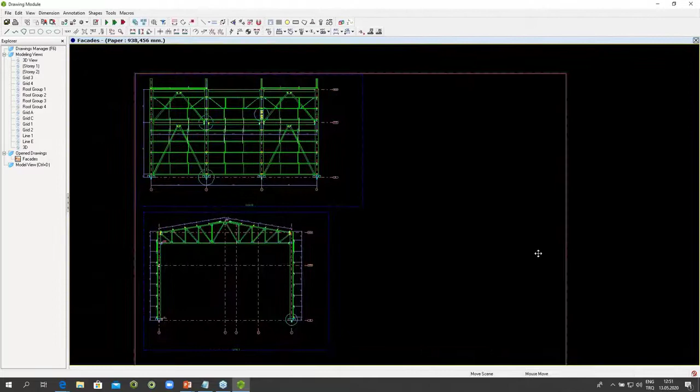So here I've done something. This is the facade I was showing you, and as you can see, all the connections are here: the girt connections, the bracing connections. Here you see the truss connections. You can give the dimensions. You can give the levels. The girts have been dimensioned as well.

But what I want to show you right now is these three circles. This circle and this circle and this circle over here. These three circles came from those boxes. They haven't been labeled yet. I'll show you a command in a second. Any box which enters into this drawing will come up as a circle. It won't come up as a box.

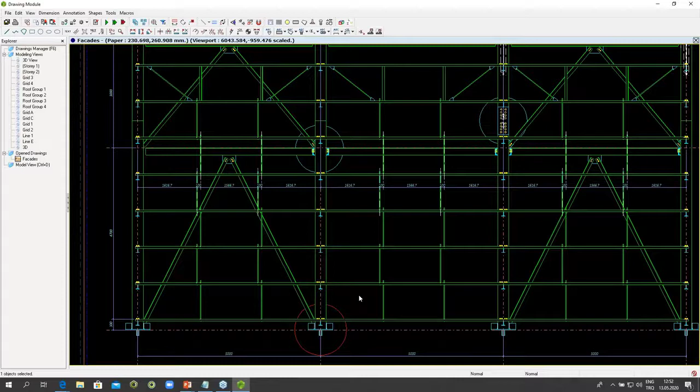And then once they're there, all you need to do is go to this same tool on this side, load the default settings, and just press the button. What happens is, in a few seconds, the boxes which are shown over there are created, and you can see all the main members, all the bolts, all the welds have been annotated from the views which I wanted.

So I told it which view I wanted: the front view, the back view, the left view, the right view, whatever 3D view, and they're all annotated over here. So this is maybe about 70–80% of your connection. Maybe you need to add a few dimensions. The only thing which it doesn't do at this point is add the dimensions.

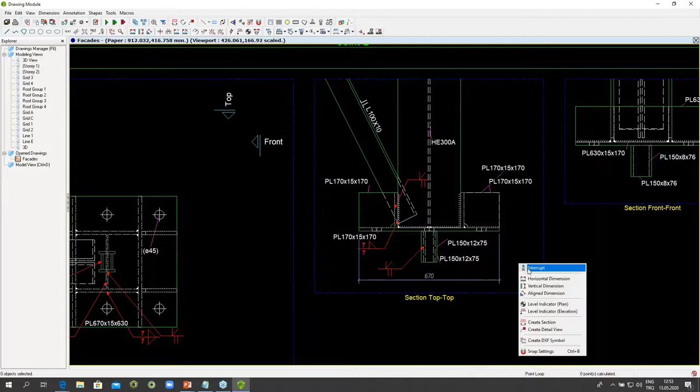It does give you the thicknesses of the plates. It does give you the size and the number of the bolts. But if you want to add a dimension, you'll need to add that manually at this point, and we're working on it, hopefully we will get some sort of feature on that later on. But the annotations, the elements themselves, and the views will come from the program automatically.

So this will be a huge feature, hopefully, for the consulting companies, because all you need to do now is quickly finish your work in ProtaStructure, transfer the model to ProtaSteel, and go ahead with the detailing. As you just saw, it's a breeze. You basically click on everything. If you find that difficult, you use Intelli-Connect whenever you can, and you finish the modeling.

And once the modeling is finished, you create these little boxes around whatever locations you want to highlight or emphasize to the fabricator, and you produce these general arrangement drawings, and these little boxes then turn into details. This is extremely useful.

What I want to show you now, and I'm going to go through it very quickly because I want to leave a few minutes for questions, is the production of shop drawings. Consulting companies might think they are not in the business of producing shop drawings, but they can be. It's not forbidden, and they can make money out of it, because the client is going to pay the fabricator.

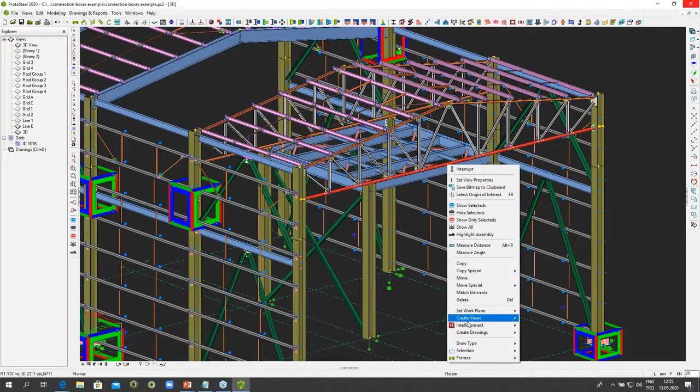All you need to do is select a truss, for example, right click, say create drawing, and create the assembly drawing. That's as simple as that. Or you can select the whole building, right click and say create assembly drawings. There you go. All your trusses, beams, purlins, girts, columns will be detailed and annotated. Let me just show you something before I continue.

Maybe I can show you this column over here. If I show a highlight assembly and show only this, yeah. So this is a column.

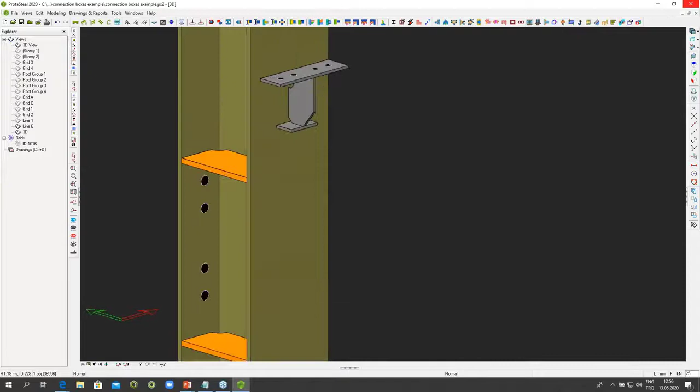This is the column fabricated, and I can produce the shop drawing of this column directly on the go over here. You can view it on the screen just to see if anything is missing, and that's a very quick way. But now I want to just take you to the shop drawing feature. So like I said, all you need to do is just select, right click, and say produce the drawings, and it will be as simple as that.

I don't want to waste too much time on that, so I'm just going to go and open the existing one. So let's see. This is the drawing of the beam with the haunch, I think. Yeah, there you go. So if you zoom in, you can see we have the fully detailed haunch beam drawing with the stiffened end plate connections on both sides. It's fully dimensioned. There's no dimensioning needed. All the single parts are also added. Obviously, this is optional. You can have the single parts in there, or you can have them separately as A4 sheets. You have your material lists.

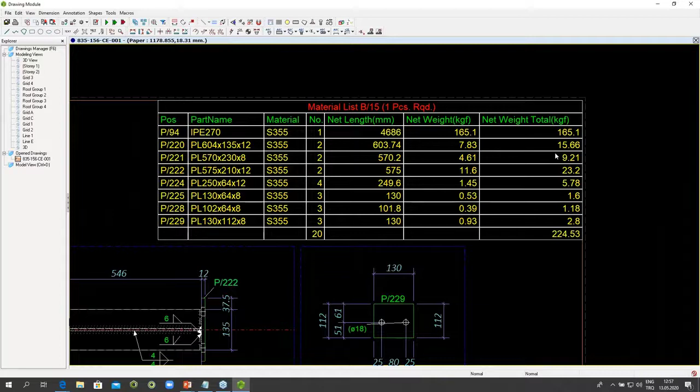These are all customizable, by the way. Not necessarily what you get. You can customize these things, and they're pretty customizable. And you can change the dimension properties. You can change the colors. You can change the sizes. You can decide whether you want to show the welds or not. The scales, and it's a very comprehensive tool with which you can produce your shop drawings.

Let me show you an even more difficult one, something which most programs find almost impossible to deal with, and they are trusses. If you've worked with trusses in other programs, you will have noticed that detailing the truss, creating the assembly drawing of a truss is one of the most difficult. It has to be almost completely redone by hand, because what the program gives you is basically a mess.

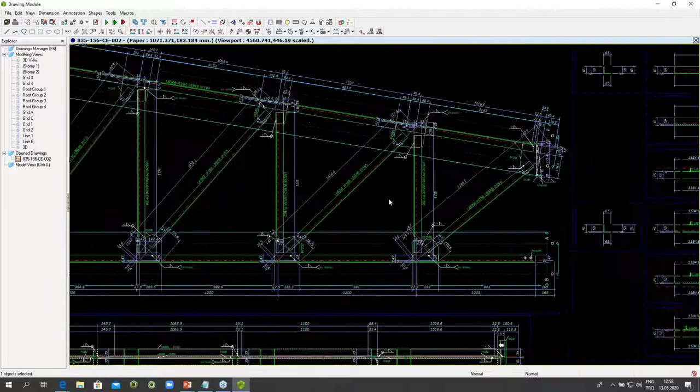But over here, this is the truss which we modeled over there. Just look at this. Just look at this detailing over there. It's extremely accurate. It's extremely useful. This can be used directly in hundreds of projects in Turkey. You just send this to the fabricator, and they just produce the steel. So this is another feature which I wanted to talk about. And like I said, the part drawings are also producible. The assembly drawings are also producible. The general arrangement drawings are also producible.

And once you're through the learning curve, which is hopefully not much, and we can help you with that. We can help you with the training if need be. But once you're through with that, you should have a tool in your hands which is going to reduce your man hours by hopefully several fold. So what you did in a month, you could probably do in 10 days, hopefully. And that's a lot to say for a tool like this.

Now, obviously, I could not go over a lot of features. It's a very powerful program, the very best. And while what I've showed you is simple, in reality, it can handle some of the most complex of situations. Because what I haven't shown you is the manual detailing feature, with which you can completely detail your structure entirely by hand as well. You can create the most complicated connection; you're not limited to the macros. The macros will help you do it extremely fast, the Intelli-Connect feature will help you do it extremely fast.

But if you're dealing with very large scale projects, very complicated projects, very prestigious projects, you will end up with something which is not available in the macro list. Eventually, that just has to be. That's my experience. The macros will always work for the mainstream kind of steel detailing, but when it comes to very specialized structures, you will need manual detailing. And once again, ProtaSteel does not leave you midway. You can complete the whole thing with manual detailing, and that's extremely fast as well.

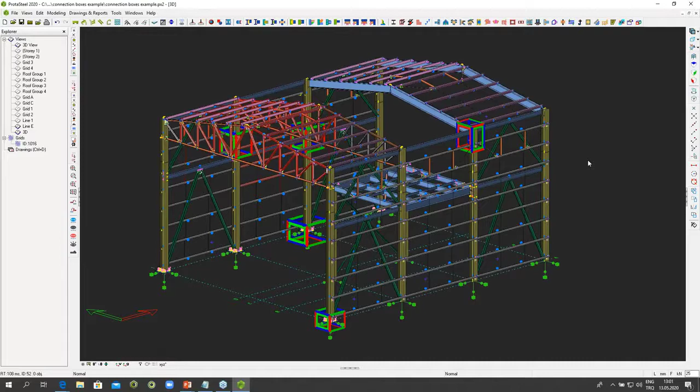There's a fully functional CAD package, which I didn't mention, but you don't need to use AutoCAD with this. You can produce the entire drawings within it. So let me just finish the live demonstration over here, and let's continue with the webinar.

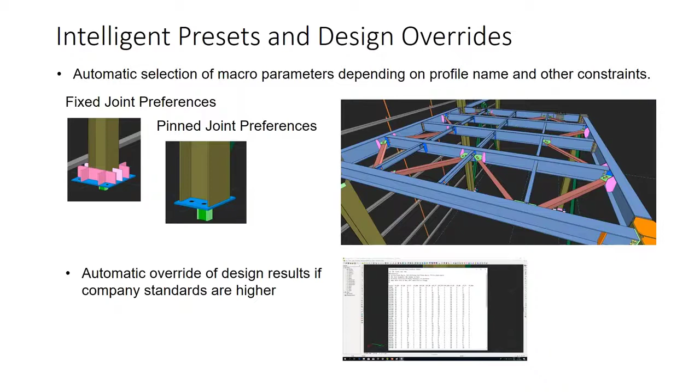Intelligent presets, I didn't talk about them much because of lack of time, but once you set up your company standards, you can just click away to infinity. In most cases, you will not need to enter much in your macros, and you should be doing that, the intelligent presets. Automated design reports I talked about, the greens and the yellows and the reds.

Like I said, right now we have all the floor beam connections, all the beam to column simple connections, all the beam to column fixed connections, the base plates, the vertical bracing, horizontal bracing, bolted connections, the truss connections, the splices. So basically everything is in there except for some minor sag rod connections which you don't want anyways. But connection needs are already in there. So you will save a lot of money and time, obviously, by using ProtaSteel.

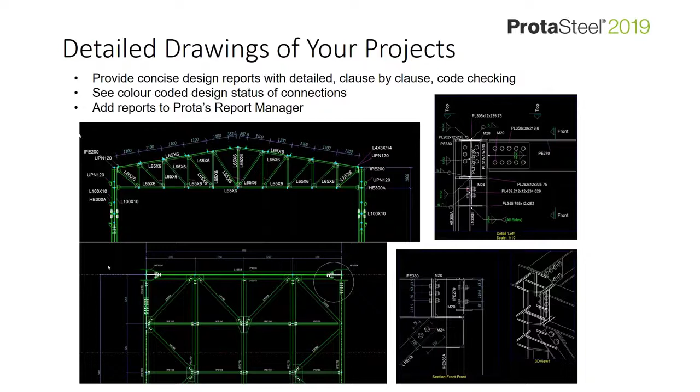You can produce detailed drawings of your projects. I just showed you those, the general arrangement drawings, the connection drawings. Those are extremely useful. You can create fabrication details, I just showed you as well. And you can produce NC data as well. So that is a lot.

And once you're done with it, it doesn't stay with you. You can share your model with other people. You can share it through IFC. You can share it through the Tekla exchange format we have. You can share it with Allplan, etc. Basically anything which works with an IFC. ProtaSteel works with IFC, so there you go. So that's what I wanted to say.

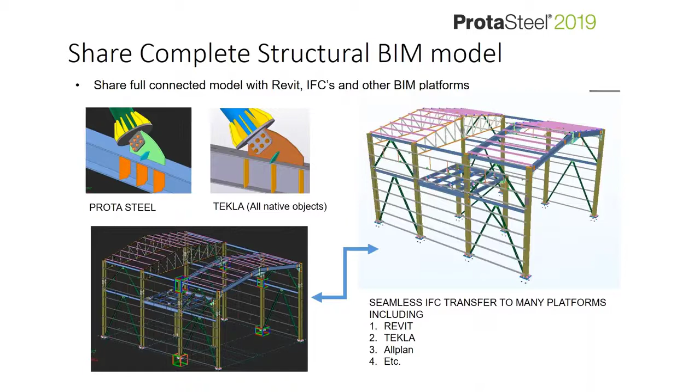And the Prota advantage, exceptional value. If I just want to summarize the Prota advantages, if you see other solutions, they're all over the place in the sense that, first of all, they're selling everything separately. So even if they have this tool, you're going to pay extra for it. But as far as building design, drawing management, a full DWG drafting capability, component design, full RC quantities and schedules, automatic steel connection design, steel detailing, shop drawings and quantities, which we talked about today, and collaboration with BIM are concerned, everything is in one package.

That's something you will not find elsewhere, and that's something which we want to emphasize, because it's not only going to save you time. It's also going to save you money because you'll not be paying for a million different softwares. Everything will be included in the ProtaStructure suite. So we hope you liked what we covered today.